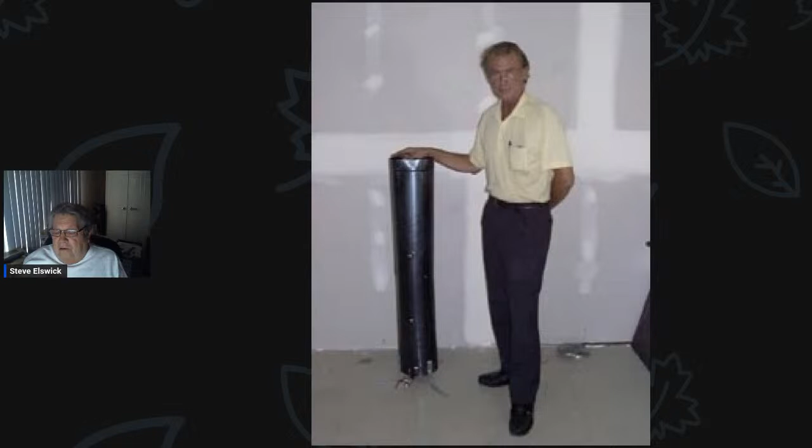Many of you, I'm sure, have met Paul Pantone. Paul was an extremely good friend of mine, and he's the inventor of GEET, which is basically a plasma generator that replaces your carburetor. It can be used in just about any configuration, although most of us have seen them in engines. Paul has actually made a furnace - that thing he holds is actually a furnace.

And from that furnace, it forms the basis of his Homestead. Now, the Homestead power system consists of the GEET furnace, which is the primary converter.

The input would be like a fuel system - you can have liquids, you can have solids, you can have gases. GEET will run on anything properly configured. From the furnace, you get gas storage because you always have excess gas being generated. You'll also be able to have hot and cold exchange because where you have heat, you have cold, so you'll be able to pull that off the furnace. You can use some of the gas to go in and generate electricity, either through the gas or who knows.

Part of the power system, I drew these up back in the day. One of the things I was looking at was making a homestead power system. This one here would be for air conditioning and heating, where you'd have a pump and your radiators, and your squirrel cage blower to blow through all these radiators. I was designing this thing to be built out of junk, so it could be built by anyone who had any kind of mechanical bent.

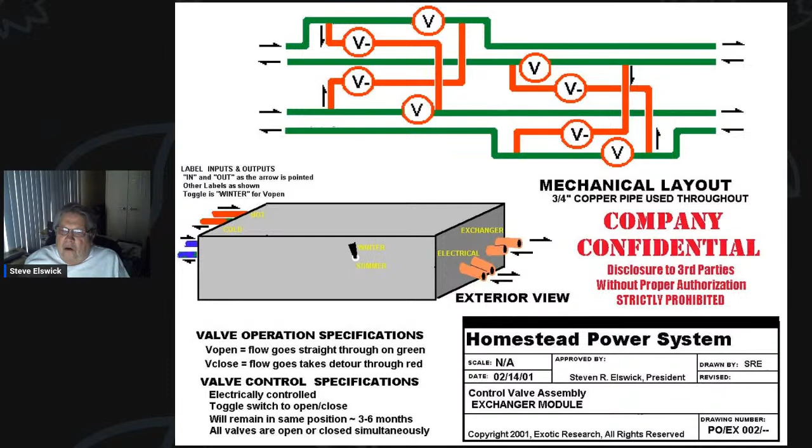If you go back here, you see that square box in the middle - that would be the heart of the system. Basically, it's just a series of valves which redirects the water. In the winter, they'd have the heat flowing in one direction, putting hot water through those radiators. In the summertime, you flip the switch and it will redirect all the water flow, and you'd be able to get cold air through from the radiators. One of the tanks would be hot water, and one of the tanks would be cold water.

And here's a better picture, I think.

As you can see, we also have the electrical generation system, which could use heat to generate electricity. We have some ideas on that too. This was also designed so you could hook it into the solar system and pour off hot water from your solar panels. A lot of times the heat generated off solar panels gets them hot, so you could put water pipes behind them to absorb some of that heat, keep the solar cells cooler, and use that heat for hot water, for showers, and for our system here.

Okay, here's the heart of it. This is Paul's dream here. This was the furnace. Now, I said that you could burn solid fuel in the GEET, and if any of you have ever seen the GEET device, here it is. If you want to see it better, there's a little square box to the right side of the screen, and you can bring this up to full screen and see the writing a lot clearer.

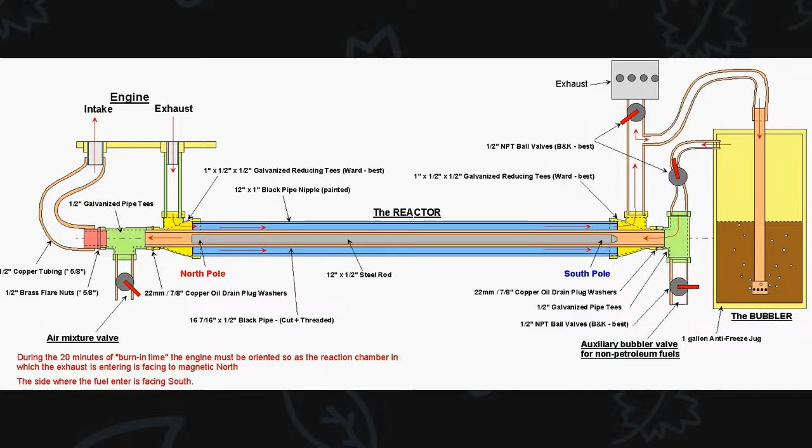The thing with the tip is that when you have it, you get the Bernoulli effect and the Venturi effect. One will increase the speed and increase the volume at the same time, and increases the pressure. When it does that, the flow of the gas going through kind of twists the molecular structure, popping everything out and creating its own plasma.

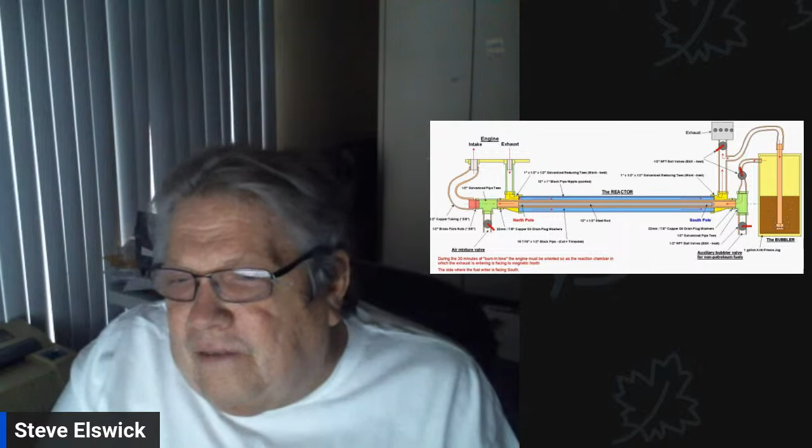Now, the orientation of the rod is very important, because if the rod is backwards, it puts an opposing magnetic field on which prevents the plasma from being generated. If it's oriented right, it will have a magnetic force that enhances the plasma you're trying to generate, and it gets better, bigger, and faster on you.

Paul told me at one time that he found later the important thing about the rod's length was to have it long enough to accommodate the reaction. If it was too short, you couldn't get the plasma to occur, and if it was too long, all that happened is that part of the rod didn't get magnetized. He had various things for different fuels, but basically you'd use a rod that would cover the whole range of them, so you didn't have to worry about it at that point.

Let me go back. So yeah, that is your basic GEET reactor. Here you see it in a horizontal position, where your intake and exhaust is coming from the engine on the left, and on the right you see the final exhaust and the intake from the bubbler.

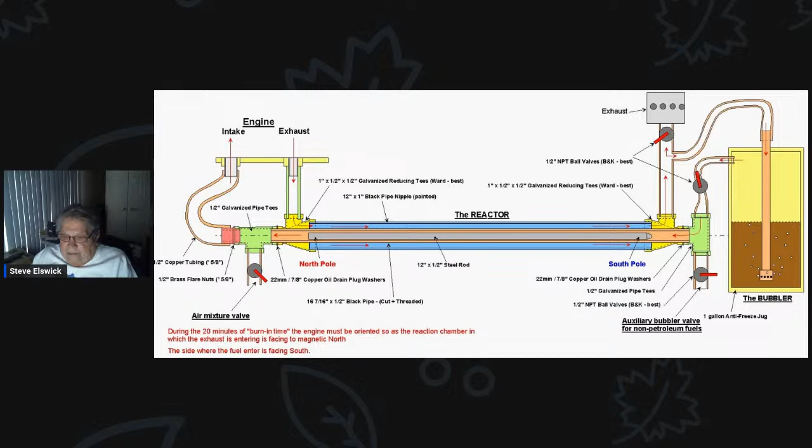Now, if we go back, here the reaction chamber is right in the center of that flame, and it's in a vertical position. So the characteristics are a little bit different, but that's where the reaction is.

So what you'd have here, off on your right, you could have some kind of stove, something you can burn, and you pinch off the chimney of your stove there. You can burn garbage in it, you can burn wood in it, you can burn anything you want in it.

But what happens is the fumes get sucked into the chimney, go down this tube into the bubbler, and it bubbles up through the bubbler. After bubbling through, that gets rid of a lot of the trash and ash that would be in it, and it gets sucked down into the reaction chamber, and it goes down through, and you see the P, that is a pump. That pump is extremely important.

You could probably use, Paul told me, a smog pump off a car would work. You take that and create the vacuum for the reaction chamber, because all this has to happen in a vacuum. With the vacuum, all reactions occur at a lower temperature, and that's how we can have low temperature plasma, because it's actually in a vacuum. Unlike conventional scientists who study plasma in atmospheric conditions, which takes a lot more temperature.

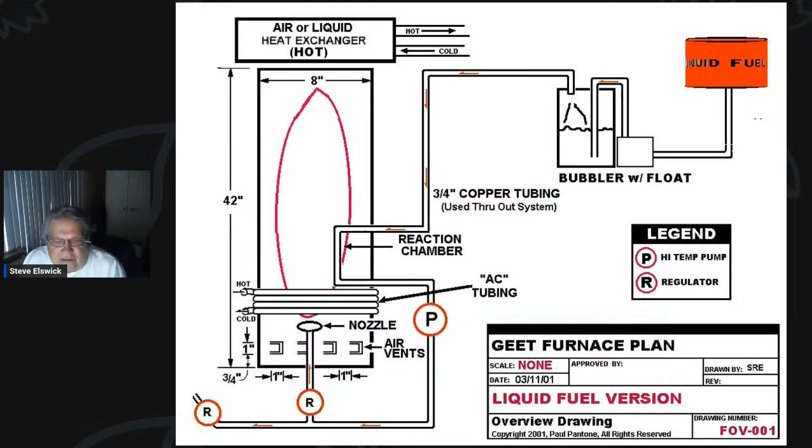Anyway, I think that's about all I have on this right at the moment. I came up with this back in 2001, and I was going to give it at that conference, but we had such problems at the conference I didn't have a chance to even speak. It was like one fire after the other, which brings me back to our upcoming conference.

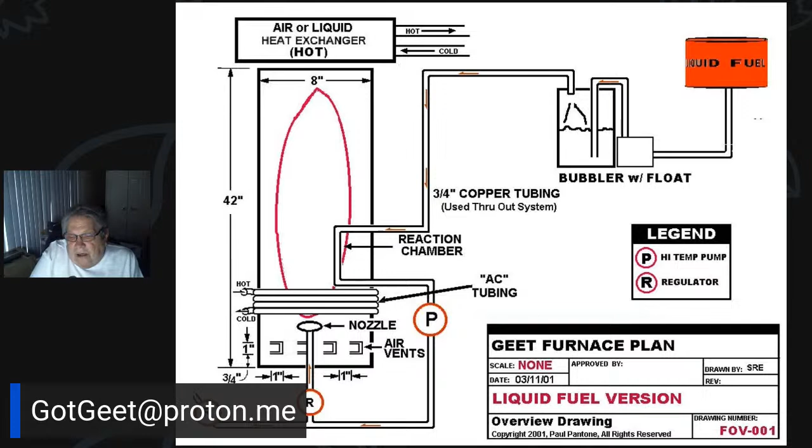Because this thing breaks down the molecular structure of all fuels into its basic elements—carbon, hydrogen, and oxygen—you don't get the carbon monoxide or carbon dioxide you do with other combustion systems. You're turning your vehicle from an oxygen user into an oxygen generator. You're unleashing the oxygen that's locked up in the carbon fuels, and you're separating the carbon out from the fuel itself.

And the carbon by itself is a very good soil additive, which our soils do not have enough of, especially since we've chopped down all of our trees and don't leave the carbon mass in there. If you go to a company called Acres USA, they have a lot to say about carbon and adding carbon to the soil. A nation that destroys the soil destroys itself. We don't do enough to take care of our air, we don't do enough to take care of our soil, and GEET is one way that we can start doing this.

Now, this is in an experimental stage. I would never, ever tell anyone to take your workhorse car or vehicle and use it for this. This is what you get junk engines for, or junk cars—cars that are unreliable for your own transportation. Keep your reliable transportation. Get yourself a used vehicle for this kind of stuff, or used lawnmowers, and play with this stuff. We have the plans online.

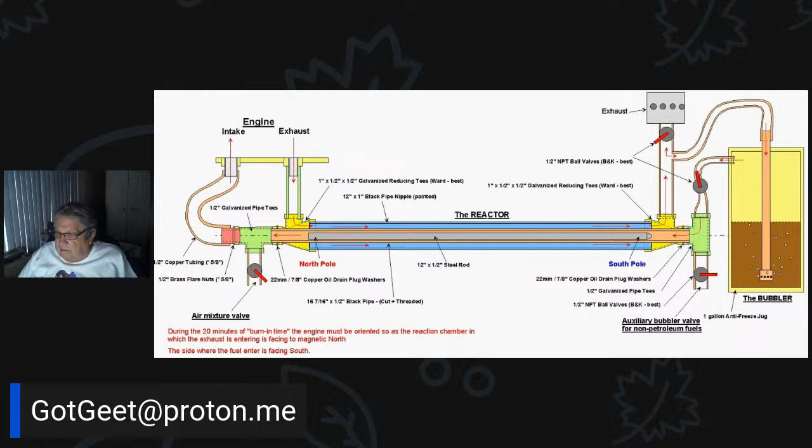So anyway, if there are any questions, I'm ready to do this. I see one of our first comments here is about Paul and Molly on the WWCR shortwave radio station on the Stan Solomon show. I remember those days—when I was at the Tesla Society, we had our own show on WWCR on Sundays at this time. This kind of replaces that, and I hope this helps everyone understand.

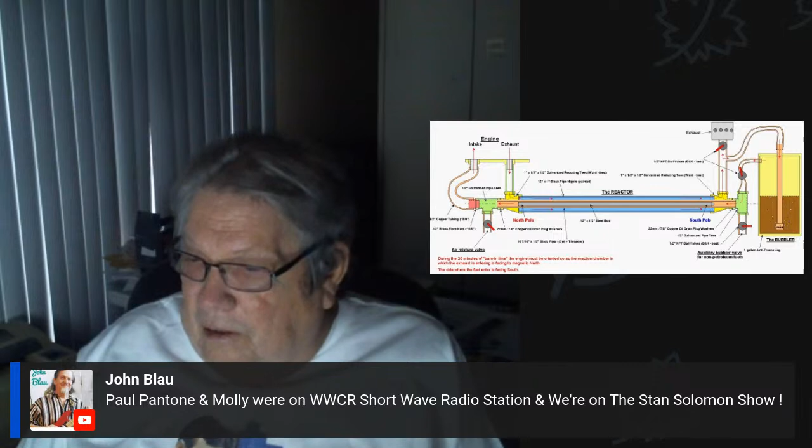Okay, the biggest barrier to mass production of GEET engines—right now they're still in the experimental stage, and a lot more needs to be done. You look at today's cars, they're computerized—they went in and know exactly how things burn, and the computer adjusts the carburetor.

Well, this needs to be done the same way, because on Paul's automobile plans he has a thing called an air manager, with a bunch of valves in it that controls the amount of air getting into that GEET. That has to be controlled. Right now you have to do it manually, but things just need to be studied.

In one of our back issues of the magazine, we covered where MIT came up with an invention that mimics GEET, except that they use electric power to heat the fuel, whereas Paul uses the heat right off the engine to heat up that fuel.

But it just takes more study and dedication from people. The more people that experiment with these things, the easier it is to get things to happen.

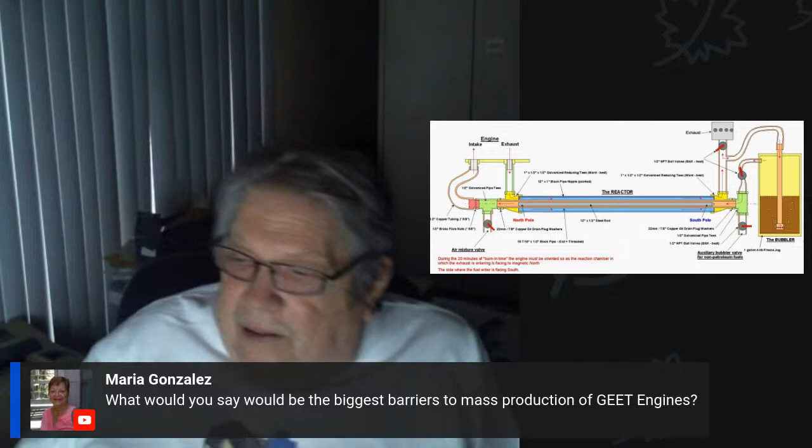Anyway, yeah, too much of anything is bad, but CO2, I think you mean, is necessary. Well, that's because it feeds plants and everything, and plants use it and convert it to oxygen. But our problem is that we're cutting our trees down.

Look at the Amazon; they're burning the trees down and cutting them down, and in the process they're not only adding CO2 to the air, but they're turning around and destroying the ecology of the area, from a tropical rainforest into, well, it could end up being another Sahara in South America. Because people don't understand that plants put a lot of moisture into the air. It's a system. You need those plants.

If you've ever been in Illinois in the middle of summer, like in August, it's plain outright miserable because it's 90 to 100 degrees there, and you have all that humidity, and it's just sweat standing on you, and you don't get rid of the heat. That's because corn puts a lot of moisture back up in the air.

The same thing happens with the Amazon rainforest. Okay, and CO2 is just one of the places where we get oxygen from. Plants are great transformation devices.

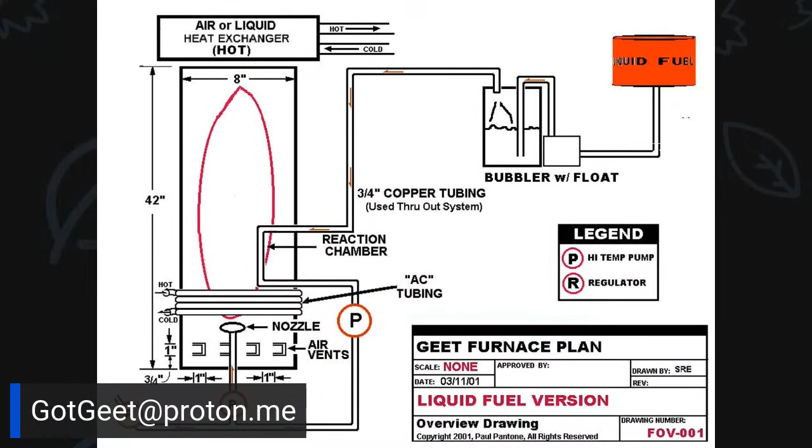Sorry, I'm just kind of winded, folks. Anyway, let me go back here. This furnace, I keep going back to it. If you look at the top, you have an air liquid heat exchanger on top of this thing, because the top of the flame is going to be super hot. The bottom of the flame is going to be cold.

That's how refrigeration works. Yeah, I learned a lot listening to Paul when he was alive, and he'd go to a lot of his conferences. I used to have a 10 horsepower engine, and at one point I rode in his car when we took it up to Blaine, Washington. This was back around 98 or 99. I went up to Blaine, Washington for a water conference, and I rode in with Paul up there, going up hills, down hills, everything. So when these people tell you this stuff doesn't work under load, they're full of it. You just have to adjust your air mixture.

Off-topic question: you put up the good fight for a long time, but who will take over Tesla Tech after you begin a new chapter in life? When you're gone, will Tesla Tech still be around? I am working on that.